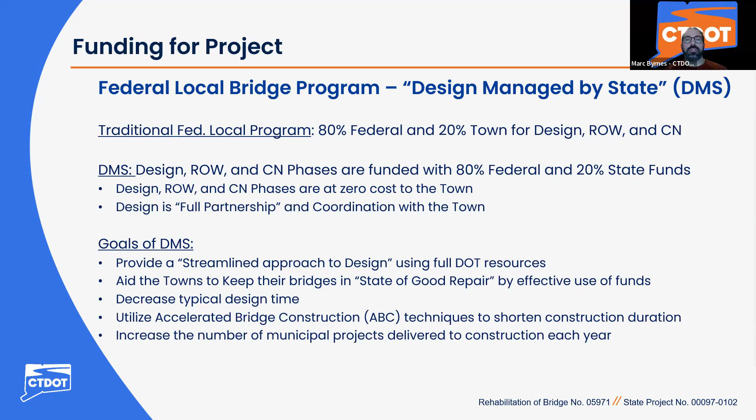Representing Clough Harbour and Associates, who's our consultant liaison engineer and acts as an extension of us, is Anand Sasadri, CLE team lead, and Dionys Quezada, who's the project engineer.

Bridges are rated on a scale of 1 to 9, with 9 being in excellent condition and 1 being an imminent failure. But please don't let that concern you, because if there was ever a concern, corrective action, or our bridge safety office would reach out to the town to take corrective action.

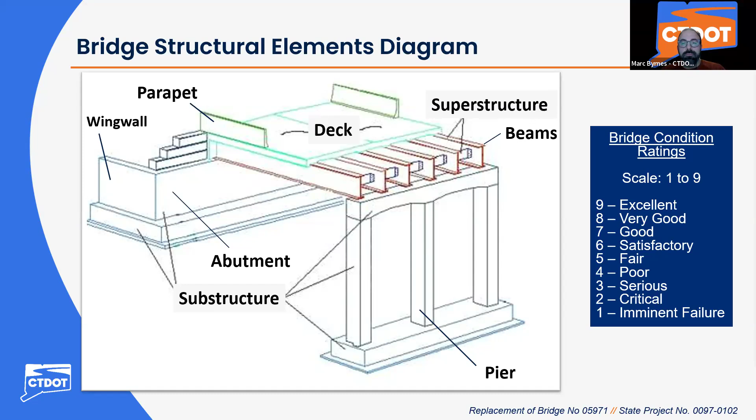Efflorescence is a chemical reaction. This occurs when there are different chemicals inside the concrete, resulting in that white substance that you see come out of the concrete at times.

Honeycombing is a result of improper setting or pouring of concrete. So when concrete is poured, if it's not completely set up correctly and the forms are removed, you'll see those kinds of voids right there.

Scaling is a result of concrete on the outside curing faster than the inside, leaving it more prone to damage from either vehicles or freeze-thaw, things of that nature.

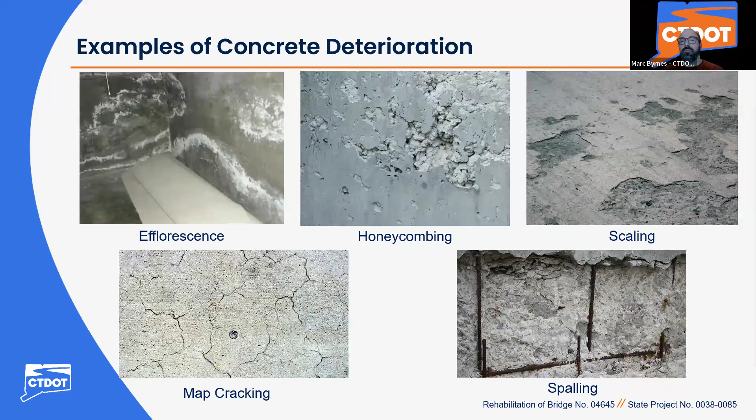Thanks, Mark. This is not the first bridge we've worked on with Connecticut DOT. In fact, we have four bridges in town that we're working on right now. We work quite closely and are in constant contact with each other on what's going on. They've been very responsive to our needs.

One of the things I know we're going to focus on tonight is the Smith Road Bridge. We have discussed the Smith Road and the Old Goshen Road Bridge on many occasions. As everyone watching this in Norfolk knows, we lost both of those bridges in flooding in July of 2023. We're trying to put together a plan now with the DOT to tackle Old Goshen Road first.

But tonight's meeting will focus on the plans for Smith Road, and I'm sure we will shortly have a meeting focusing on Old Goshen Road.

And for those watching as well, we are working on a plan to put a temporary bridge on the Smith Road site, so we can alleviate some of the issues there, as well as help the DOT and the construction company that will be building Old Goshen Road to alleviate some of their pain in building that bridge. But thank you very much to everyone at the DOT and CHA.

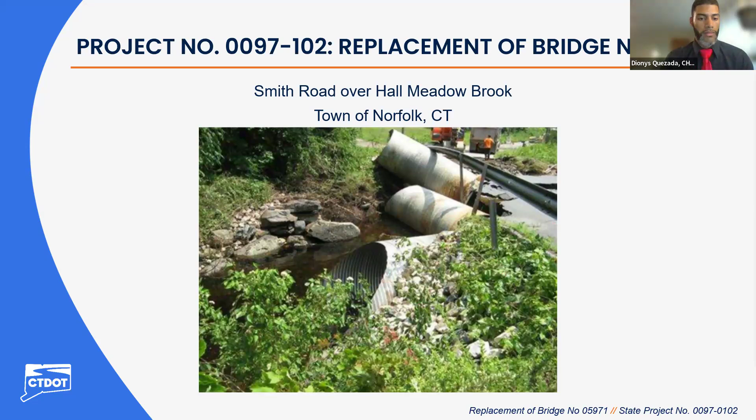Thank you, Mark. So Bridge 5971 carries Smith Road over Hall Meadow Brook. It's located south of Norfolk. If you go on Route 272 south, you pass the South Cemetery, and then you come around Meadow Brook.

There's a bridge that carries 272 over this Meadow Brook. Right at the corner of it, you will find Smith Road, which goes east out of Route 272. Right over Meadow Brook again, Smith Road is carried on Bridge 5971. And if you continue going east on Smith Road, you will then go into Old Goshen Road, which was just mentioned by the First Selectman.

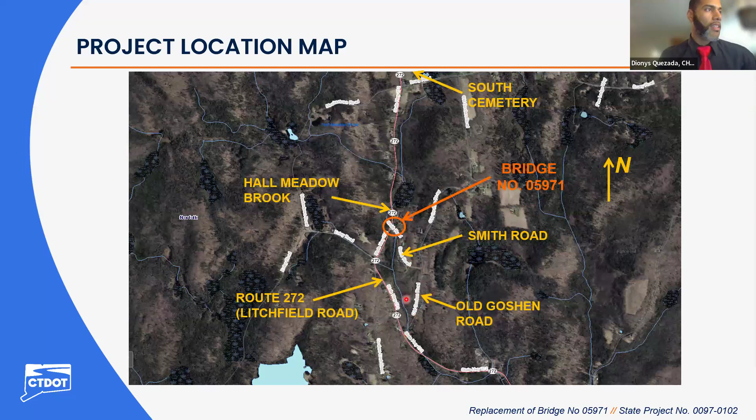But we'll focus on Bridge 5971. It has two travel lanes on Smith Road. This is an image looking west onto Route 272. The width is about 20 feet wide. It has an average daily traffic of 44 vehicles per day.

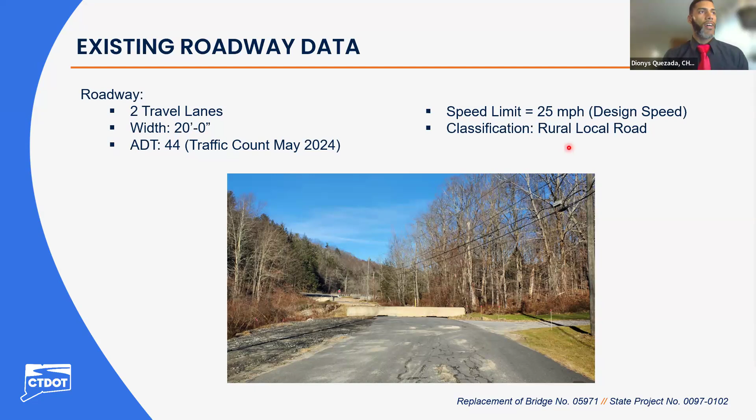That was counted in May of 2024. The speed limit is 25 miles per hour at this roadway, and it is classified as a rural local road. The bridge itself was constructed in 1999.

It consisted of three 6-foot diameter corrugated steel pipe. As you can see here, the culverts had no headwalls or retaining walls, and the metal beam rails have steel posts on them, as you can see in the picture.

Now, the bridge was washed out in July of 2023. As a result of that, we have done some hydraulic designs on it. Due to the watershed being 1.9 square miles, the watershed is classified as an intermediate structure for the bridge.

For the design storm of 100 years, the hydraulic clear span was calculated at 18 feet, with a bank full width from edge to edge of 19.2 feet.

The underclearance is the distance from the 100-year storm level to the low chord of the bridge. In this case, it would be the top of the culvert. That is not applicable since the culvert has been washed out and there is no bridge present at this moment. The natural freeboard is 2.6 feet.

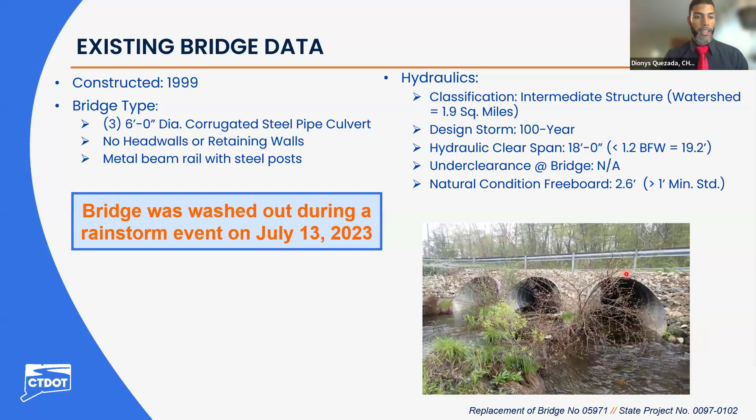What that means is the distance from the 100-year storm level to the lowest point of the roadway. In this case, it was calculated at 2.6 feet. The minimum standard is 1 foot.

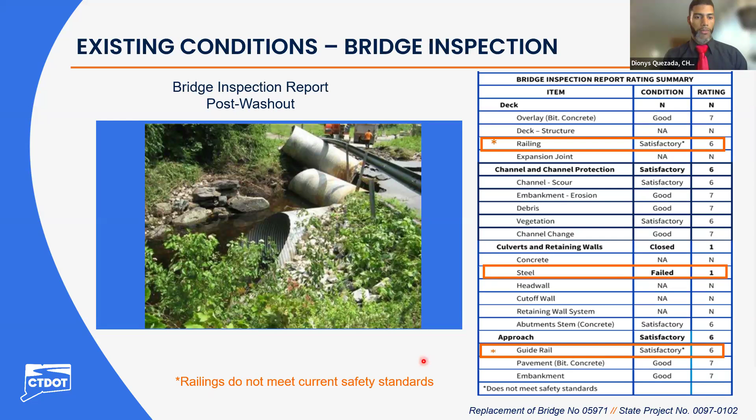Just a couple of images of what it used to be. Here's an image looking upstream at the east, looking east on the elevation, and here's a picture looking through the pipe itself.

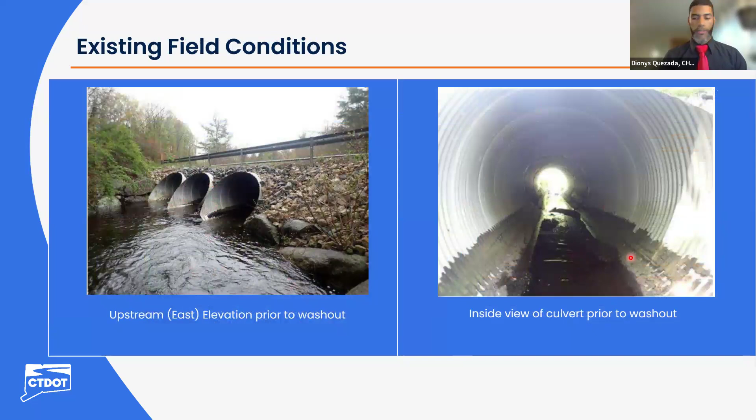Now here's an image of the roadway during the washout. As you can see, the stream was overtopping the roadway, carrying part of the pavement and the culverts along with it. Then the aftermath of the culvert just being scattered everywhere. The town of Norfolk did go out and try to clean the debris and clean the pipe outside of the stream to allow a natural stream to flow through Smith Road.

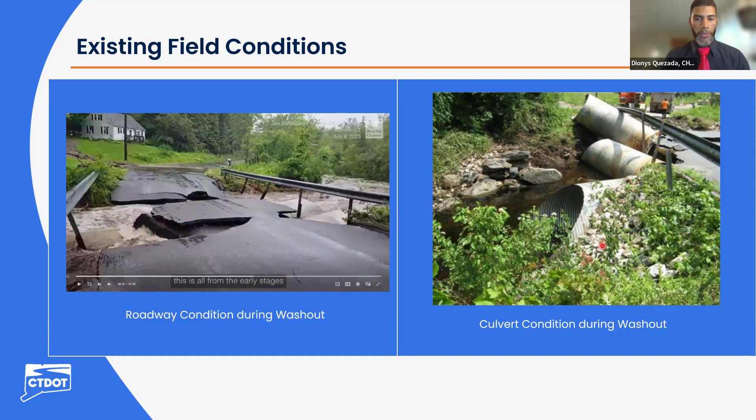Here's some images prior to the washout. The railing, that's where the culvert used to be. This is looking at Route 272. Then down below that, you can see what it looks like there today.

The town has placed a concrete barrier to protect pedestrians and vehicles from going onto the stream. Hence why it's also on the other side.

This is looking east, looking onto the bridge where it used to be. Here you see the railing, that's where the bridge was located, and now this is the aftermath. Just want to point out there is some utility on the northern side of the roadway, as you can see in the image here.

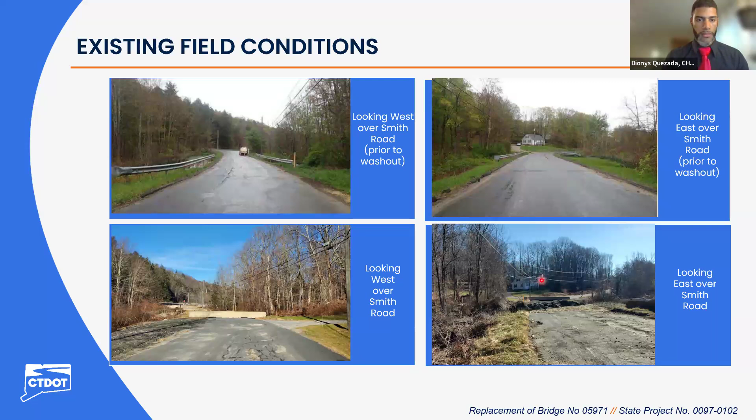Looking more into the stream itself, this is looking downstream. There is some debris that will be cleared during construction. You can see the natural stream here, and also looking upstream, you can see the wide bank. Hence, we're going to propose some wing walls to make sure that the stream is mitigated in a very nice way through the new bridge itself.

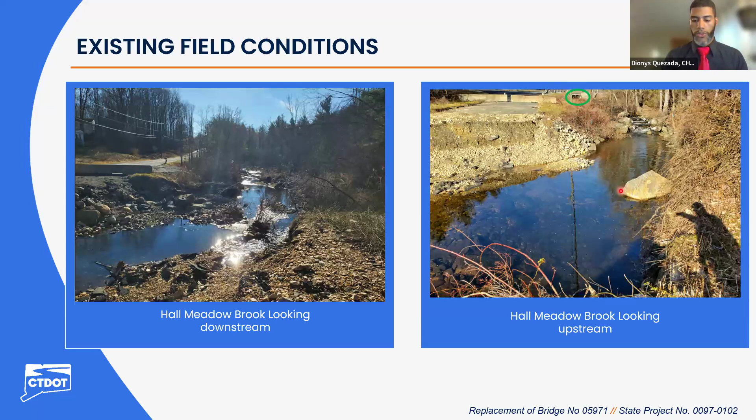I just want to point out here, there is a bridge, and this is what I was mentioning, that carries Route 272 over Hall Meadow Brook. That bridge went through the storm and actually held up very nicely.

Here's the project purpose and need. As we all know, the purpose is to replace the failed culvert with a new bridge meeting current design standards. Our first need is to increase the roadway width to 24 feet. Also to provide an open span structure to facilitate fish passage, replace the bridge and approach rail system to meet current safety standards, improve the hydraulic adequacy and performance, and minimize the need for future maintenance.

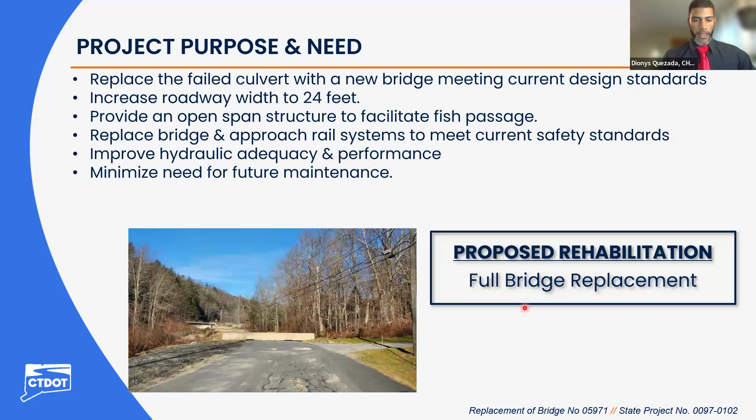Our proposal is a new pre-stressed concrete deck unit bridge. Here's an image of what that is; it will look very similar to that. It will give us a 75-year service life with minimal maintenance that meets the needs. It will carry all weight permit vehicles, so no weight restrictions. The pile foundations are designed for scour from the stream that washed out this bridge.

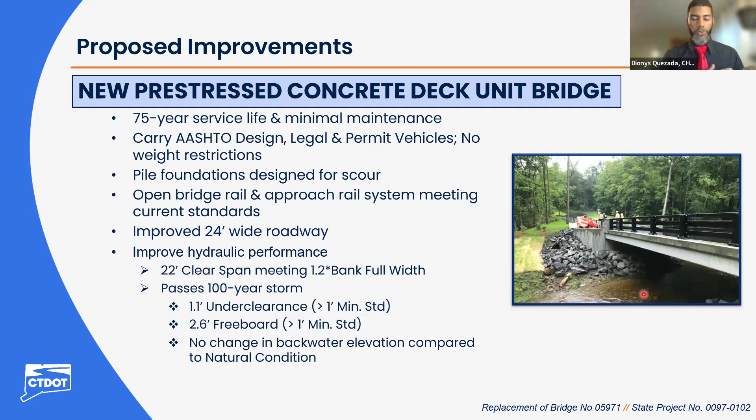Some other things we want to point out: the end blocks in the bridge rail are all the town's choice. The end blocks can be formed with liner applied to concrete, simulating stones, whatever type the town prefers. Also at the wing wall, shown here, we'll follow the town's recommendation. The bridge rail can also be the town's color of choice—it can be black, as seen in this image, or another color.

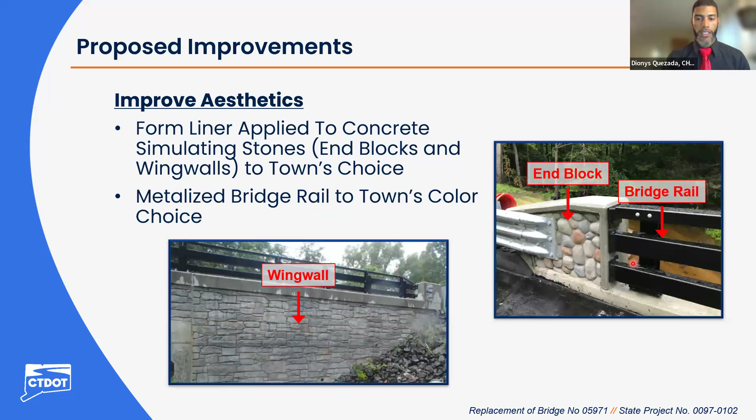The roadway has a 24-foot, 5-inch curb-to-curb width with a 3-tube curb-mounted bridge rail system installed along the bridge fascia. It will also have a 6-inch cast-in-place concrete deck slab, which will protect the 1-foot, 3-inch pre-stressed concrete deck unit, making up a total out-to-out width of 27 feet, 11 inches.

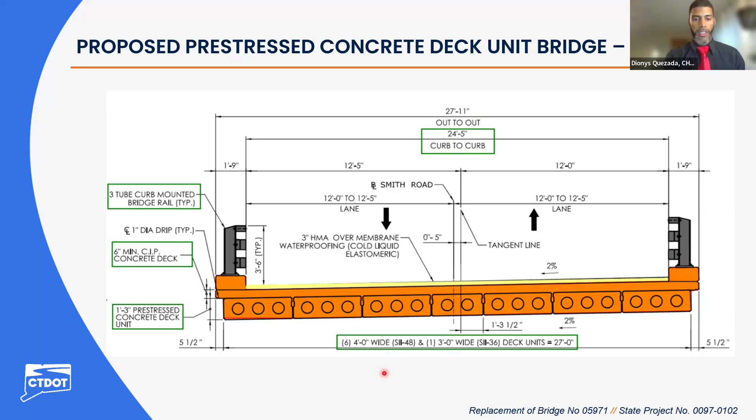This section is pretty much cutting the bridge in half, and this is kind of what you see. Also, we just want to point out there is a 2% slope, a super elevation, that will make sure all the water is drained into the side of the road.

Here's a plan view of the bridge, with the north and south arrow. Hall Meadow Brook flows from north to south along this side, and Smith Road goes from west to east.

The new bridge provides a 22 feet clear span. The orange represents the new superstructure for the pre-stressed concrete deck unit. The structural length is 26 feet 6 inches, so the total length of the bridge is a little longer than the clear span, because this is where the bridge sits on top of the abutments.

The yellow is Smith Road, which will be full depth reconstructed, and in gray you find the wing walls. These wing walls are both flared and are to be set on micropiles founded on bedrock.

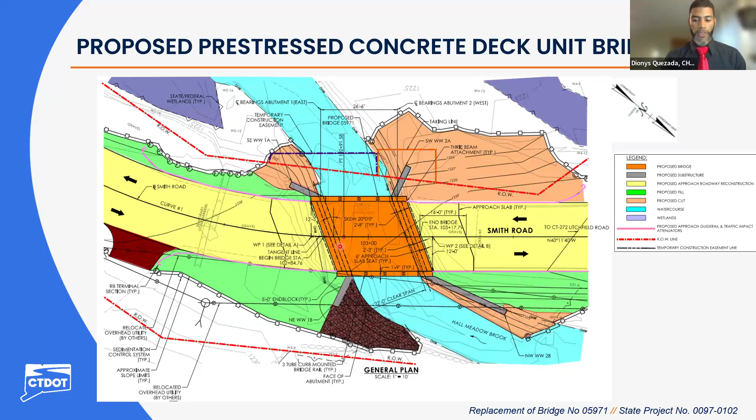Here's an elevation view, looking from north to south. Again, the structural length is 26 feet 6 inches, orange representing the bridge itself. The units are supported by abutment and wing walls, as you can see here, which are also simulating stone masonry to look like stones.

They are sitting on micropiles founded on bedrock, shown here by these little poles. The exposed abutment and wing wall section will have the form liner.

The open channel accommodates the 100-year storm, providing 1.1 feet under clearance and 2.6 feet of freeboard. It also accommodates a 500-year storm without overtopping the roadway.

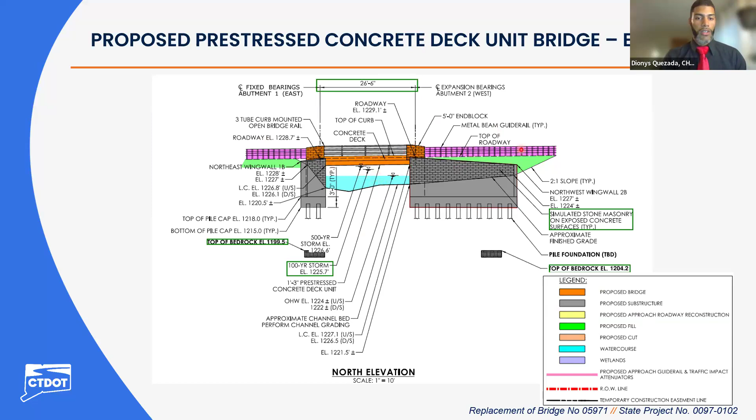That's just about the low chord of the bridge, shown here by that little yellow-orange line. In pink, I also want to point out the metal beam guide rail, which will be attached to the concrete end block. This will all meet the design standard, which it did not before.

Again, orienting everybody, here's the north arrow and the brook going from north to south. The total project length is about 360 feet. In green and orange you have the cuts and fills.

The flare wing walls being proposed are there to support those grades, those fills and cuts. The roadway within the project limits will be full depth reconstruction, so everything in yellow will be full depth reconstruction of new pavement for Smith Road.

The utility lines, located on the north side, will be relocated to make sure that when the new bridge is set in place, it does not impact the existing lines from Eversource.

Also, there is a driveway to the east of the bridge, shown here, that will be full depth reconstructed to make sure it matches the new profile of the roadway.

Also, as you can see, there is some riprap embankment on the northeast side to protect the slope from erosion, so the stream that comes here and hits that portion does not create erosion in the future.

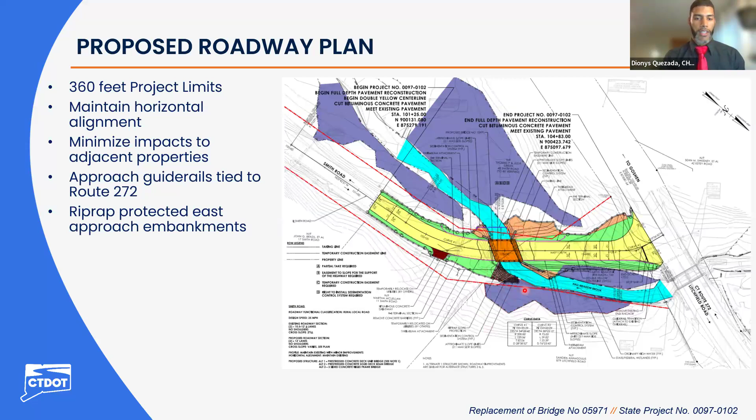I want to mention more of the profile. We're going to maintain the profile at the bridge, so no grade changes there. However, on the west side, going onto Route 272, we are raising the roadway, which will improve the stopping sight distance, helping vehicles see better when turning into the intersection of Route 272.

The roadway profile will be raised at the west approach of the bridge by about 1 foot. But on the east side, the roadway profile will remain pretty much similar to existing, so not much changes past the bridge on that side.

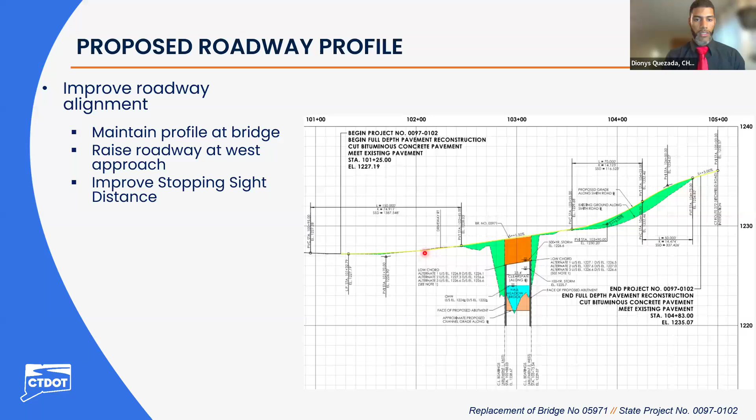Here is the detour. I'm sure people who live around here are familiar with it, using Smith Road, Goshen Road, and Bruey Road, then onto Route 272. It is 7 minutes long and 2.4 miles long.

During construction, the contractor will use the detour as they place and install the new bridge. This will be a one-season construction, so the detour will only be used for one season until the bridge is installed.

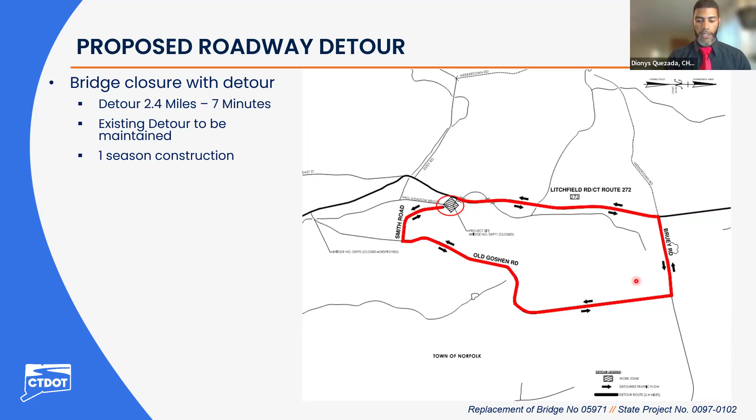Some environmental impacts: we are anticipating some tree clearing along the roadway, and temporary and permanent wetland and water course impacts. The bridge is located in a FEMA flood zone A, but it's not located within an NDDB area.

This was depicted in December 2023. The bridge is also not located within an aquifer protection area, and there are no historical impacts anticipated.

There are some permits anticipated: the Town of Norfolk Inland Wetland Permit, Connecticut DEEP Flood Management Certification, and the US Army Corps, which is pretty much a self-verification.

Utility impacts: there are overhead utilities on the northern side that will be temporarily or maybe permanently relocated. We will be coordinating with the utilities, which are owned by Frontier and Eversource.

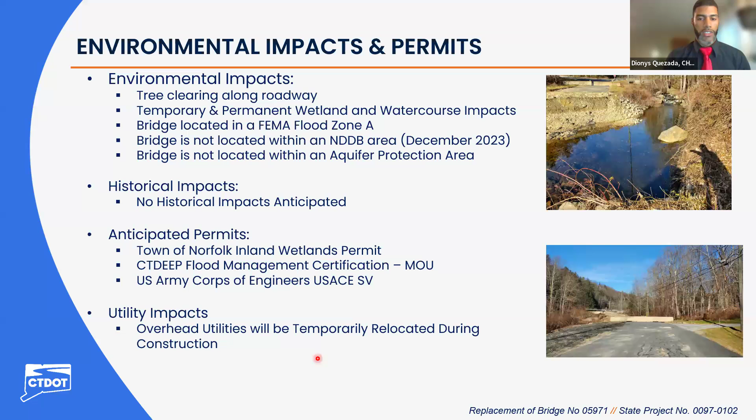I will hand it off to Zach to talk about the right-of-way. Thanks, Dionys. My name is Zachary Guarino, and I'm a project coordinator with the department's Division of Rights of Way. Our office is responsible for acquiring the property rights needed for transportation projects. As mentioned in the presentation, this project will require the acquisition of property rights, so I'd like to give a brief overview of our acquisition process.

Before I begin, I'd like to mention that the specific impacts are still being finalized, and they may change as the design progresses, and that any required property rights will be acquired in accordance with Connecticut General Statutes, Sections 13A73 and 13A98E, as well as the Uniform Act. Go to the next slide.

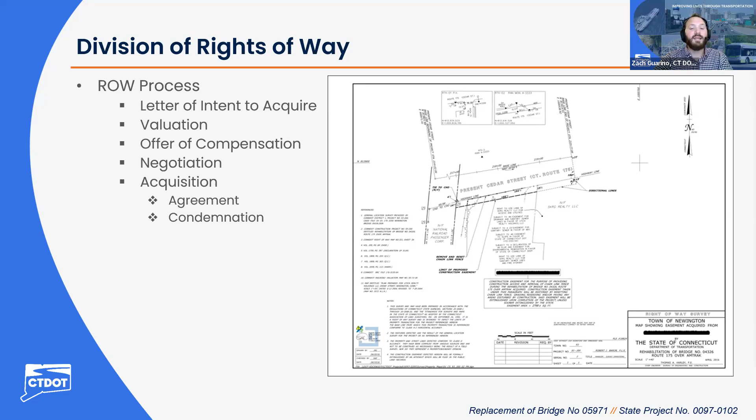With that, I'll hand it back to Marc for Q&A. Thank you. Great. Thank you very much, Dionys and Zach. All right, at this time, we're going to conclude the formal presentation. We're now opening up to your questions.

Now we'll open it up to your formal questions. We have a hand raised from Bart Wenrick. Can you hear me? Yes, we can.

Hi, it's Bart. I had a couple of questions. What exactly is NDDB area? That's question number one. Question number two, how many property owners will be required to acquiesce, or give right of way, or allow building on their property?

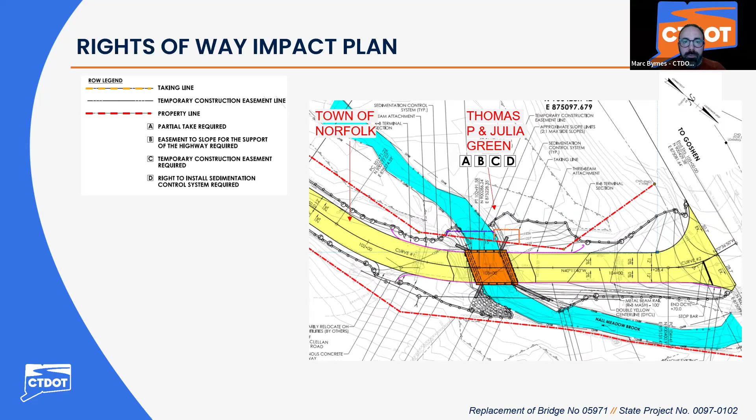Well, I did. So basically, if there is an objection or an agreement can't be met with the one individual you need to access from, that could delay the construction of the bridge, right? I mean, I know how long eminent domain can take.

Yeah, it's something we account for in the schedule. Sometimes eminent domain could actually be faster, it just depends on the situation. But if we're running tight on the schedule, then we'll have to proceed that way. So it's something we're keeping in mind.

We always like to have a friendly closing with an owner if possible, but that's something we do consider to maintain the schedule. It could take a couple months, it really just depends on what's going on out there. But in this case, I could imagine that being another month or two once we get to that deadline.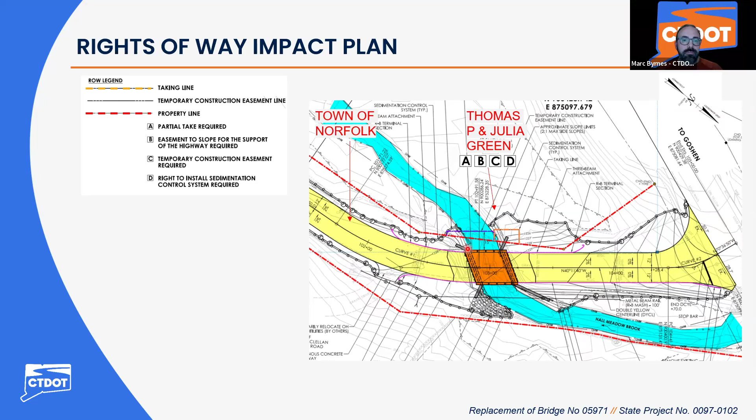Yeah, I've met with everyone at Smith Road and Old Goshen Road a couple times now. We are in the process of pursuing a temporary bridge. It would serve a number of scenarios: make it easier for everyone on Old Goshen and Smith to access Route 272, provide direct service for emergency vehicles like fire and ambulance, make plowing easier, and allow construction access and equipment for the Old Goshen Road Bridge. Plus, they're putting in a Verizon cell tower on Old Goshen Road, so it would help alleviate that too.

I don't have all the details right now, but we're working on a temporary bridge to see how quickly we can get it in place. As Marc said, because there is an alternate route out of that area, the DOT's position is that they cannot assist us in funding it, which I understand given the cost of both the Old Goshen and Smith Road bridges. But we are currently working on a plan to put a temporary bridge in, and I hope to have more information as early as tomorrow.